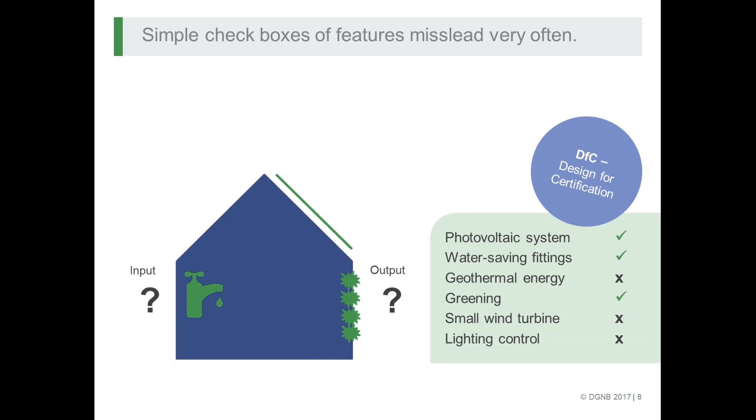When it comes to performance-based assessment, what we have learned is that simple checkboxes very often mislead, if only a feature is being seen as green or sustainable. If the context of where the building or object is located, or what can be done, isn't considered, then these checkboxes really don't help.

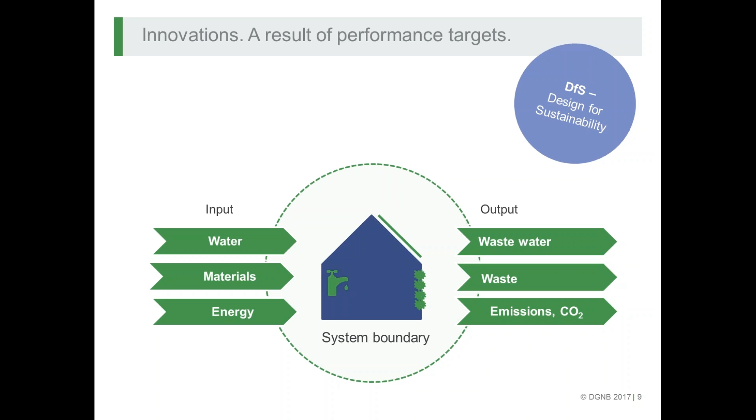Secondly, they hinder, from our perspective, innovation. Therefore we said we really want to encourage design for sustainability. I know it's quite difficult, but we really work on getting the performance perspective into our criteria, where it's more important to look at the input and output and evaluate those metrics, and not how it was done.

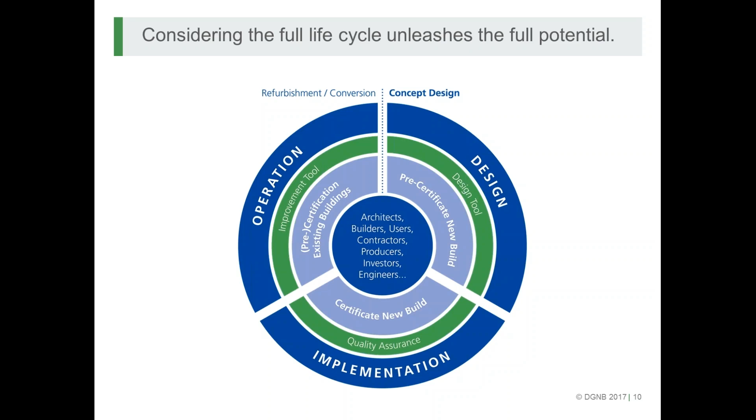The third aspect, the full life cycle, is not just the life cycle of the planning. We know it's very important to start in the design phase of the building and bring it into the realization phase when it comes to new buildings, and there we have our certificate, for example, when the building is ready to be used. But it's also, of course, important to look at the operation, refurbishment, and conversion later on.

But when it comes to life cycle aspects, for example energy performance, we have also seen that it is very important that regulatory politics are very good in supporting long-term goals. You can see these pie charts. The very left pie chart is...

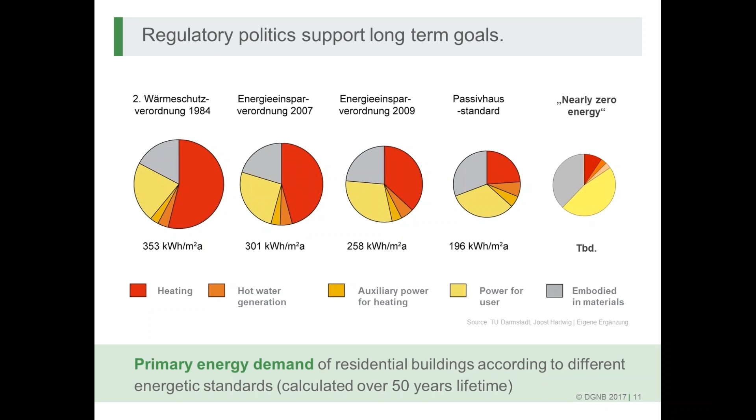1984 regulation of residential buildings shows how the energy performance looked like. A lot of power was used for heating, and a lot of power was also used by the user. Then regulation started to work on getting this heating, hot water generation, and auxiliary power down, and this really worked. The pie gets smaller and smaller, but what is getting now much more into focus, when it comes to energy and also other environmental aspects, is of course the embodied impacts in the materials, and also the power used by the user, which in Germany is not regulated at all.

This life cycle perspective showed us the development that we really have to take a look at, here in this case, the embodied impacts, for example.

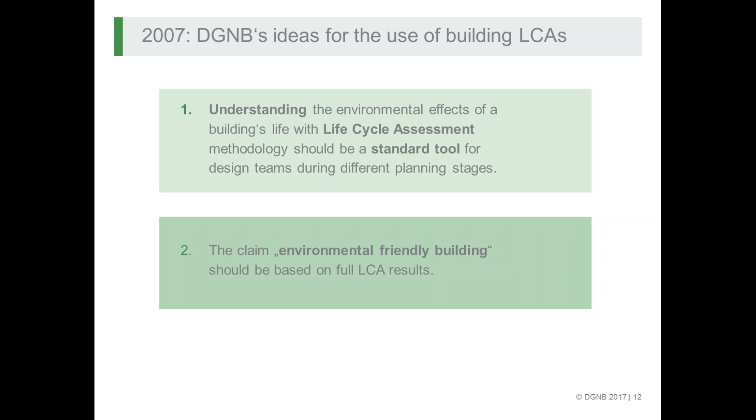And therefore, we had the idea in 2007 that we want to understand the environmental impacts and effects of a building's life cycle, and that life cycle assessment methodology should be a standard tool for design teams. That was what we wanted to achieve. Secondly, if anybody says this is an environmentally friendly building, this claim should be based on a life cycle perspective, or on full life cycle assessment results.

So why is it important to consider the full life cycle? On the one hand, we know that focusing on energy consumption only during the operation becomes misleading. I think this is the case in Europe and elsewhere, that it is covered by legal requirements anyway, and we, as DGNB, want to go beyond that.

Secondly, we know that widening the scope helps make better decisions for truly better buildings. So when I start thinking of where it comes from and what happens with it, you can really say that you make better decisions for the future and for other generations.

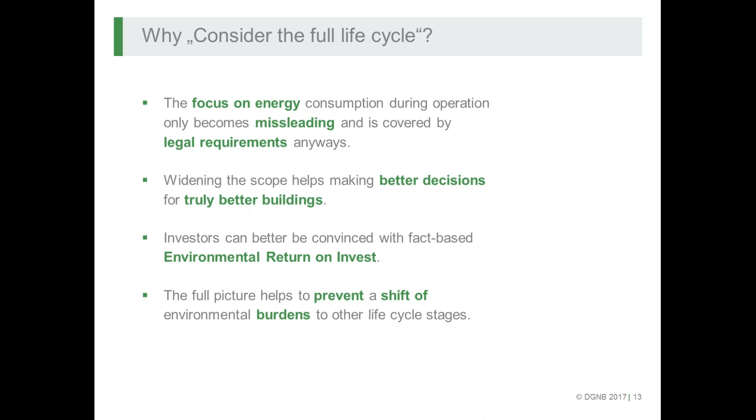Thirdly, with the life cycle perspective, you can calculate the environmental return on investment. So how much do I get from my investment, from an environmental perspective? With insulation or whatever feature you include, you can see directly, by using LCA methodology, what comes out throughout the lifetime of the building.

And last but not least, of course, as an environmental engineer, it is always important to prevent the shift of burdens to other life cycle stages. So if I do something in the production phase and don't think about the end of life, then nothing is gained.

But then we had the question, how can we start? So what's first, the chicken or the egg? We knew that as phase one, we needed to get data to start.

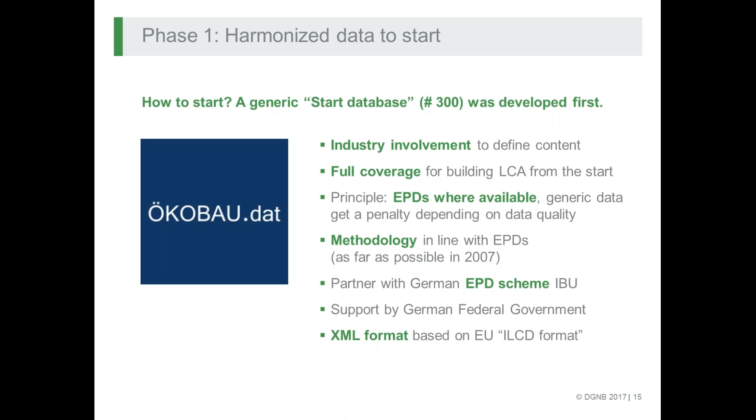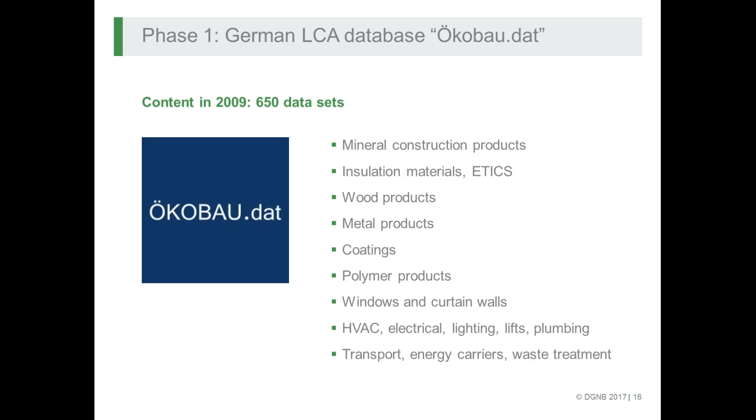We had in Germany a so-called generic start database. I think it was just 300 data sets that were included. It was developed with industry involvement and supported by the German federal government, and at that time it was in line with the EPD methodology as far as it was possible in 2007.

And this start allowed us to go further, and the database that was further developed had a big increase of interest, with more data sets being added. In 2009 there were already 650 data sets for all different product types, as you can see here, and this allowed us to calculate full LCAs, although 650 data sets is of course not representing the whole range of building products available on the market.

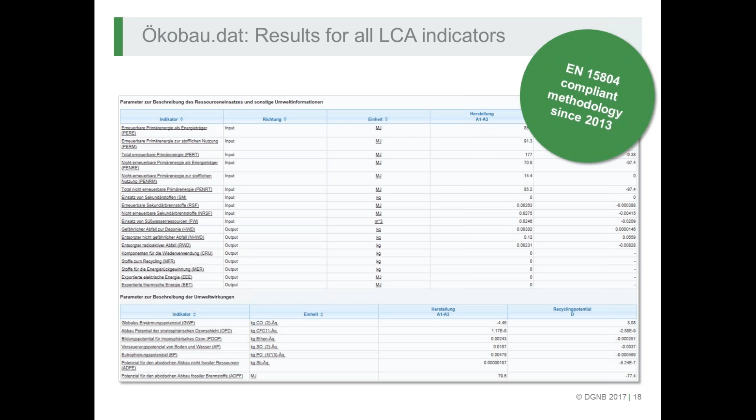But anyway, it was a very good start and allowed us to ask for full building LCAs. If you're interested in looking at the latest version of the database, it's publicly available. It's called ökobaudat.de—you can find it when you search on Google. It now includes more than 1,000 products, and by the way, it is now EN 15804 compliant.

So the results look a little bit dull, but when you know the methodology used in Europe since 2012, the 2013 version of the database followed exactly this EN 15804 methodology—the indicators, the modules, and everything required by the European standard.

And then, of course, it was also important for the manufacturers to show that they are producing what they are producing, like EPDs, that they can find it wherever they put it. And we also have our DGNB Navigator database, which includes

EPD data sets of various building products. So phase one, getting the data. We started in 2008 with the first generic LCA database, based on a consistent methodology, and this allowed us to integrate full building LCA into our DGNB scheme. Since 2009, this database is called ökobaudat.

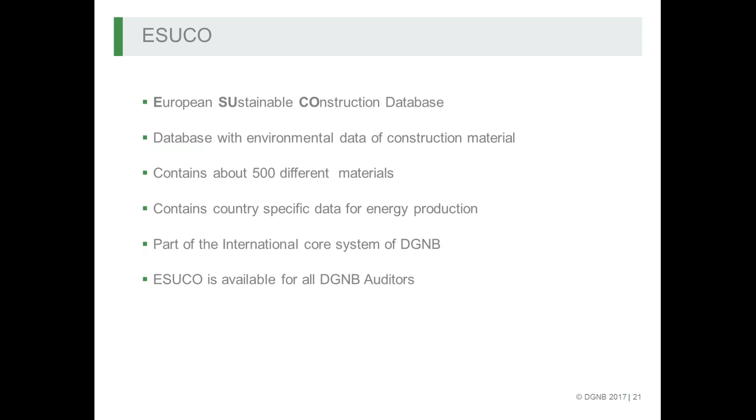It is a result of the collaboration of LCA experts, database providers, EPD providers, building ministry, and industry. In 2011, DGNB learned from this experience, and we developed and released further START databases: European average, Brazil, China. I'll show you later some content of that. And since 2012, the European standard for EPDs or LCA data, the EN 15804, was released, and this was also a big boost in Germany to do EPDs and provide EPD or LCA data in a very consistent and clear methodological way.

Very briefly, what I just said on the START databases - we as DGNB have also an international scheme that can be used, and we know that the German database is not the right tool for many applications, and therefore we have developed the ESUCO database, a European Sustainable Construction Database with about 500 different materials and country-specific data for energy production, and it is available for all DGNB auditors. If you want to know more, I'm happy to provide you more information. And the same we did for Brazil and China, and I think also for Eastern Europe average as well.

So now we had the data, we were able to say, now we want to calculate the full building LCA, but how can this be done pragmatically in an environment where planners and designers are already very, very specialized, where we all said it really brings so much value to know more about the buildings or the building products that you're intending to use. So how can we do this?

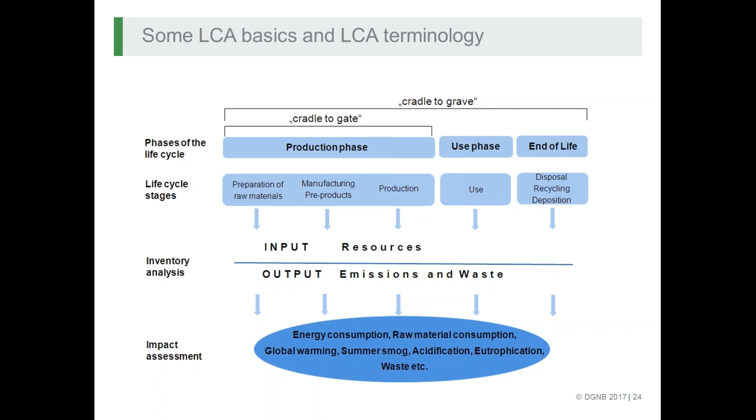Then actually somebody - brave people - sit down and look at all the inputs, the resources that are needed for each and every product step for this life cycle, and all the emissions and waste generations, and it is a huge amount of work. But the good news then is you have hundreds and thousands of entries for such a production chain, but then the impact assessment comes and uses so-called characterization factors for indicators, and then calculates so-called indicator results, environmental indicator results

that allow to work with all the thousands and thousands of entries of single emissions. So at the end you have indicator results, and this is what people can use to optimize their products, their production, or to choose or to make claims about the environmental effects.

As DGNB, we said, okay, we have to write down a standard how to do this calculation now for buildings. And in 2008, we released our first version, which included already LCA calculation as very important criteria within the scheme. And these standards, the standard how to calculate a building LCA, I think today it contains maybe 30 or 40 pages of description on how to do this exactly.

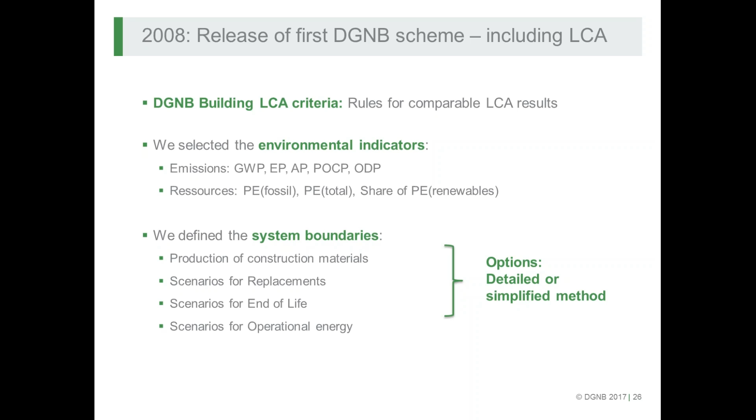And after we have selected those indicators, we define the system boundaries that need to be studied to have comparable results. Everybody can calculate as much as he or she wants to, but if you want to have comparable results, you need to define a common understanding of the system boundaries. So we said the production of the construction materials needs to be inside, scenarios for replacements, scenarios for end of life, and scenario for the operational energy use.

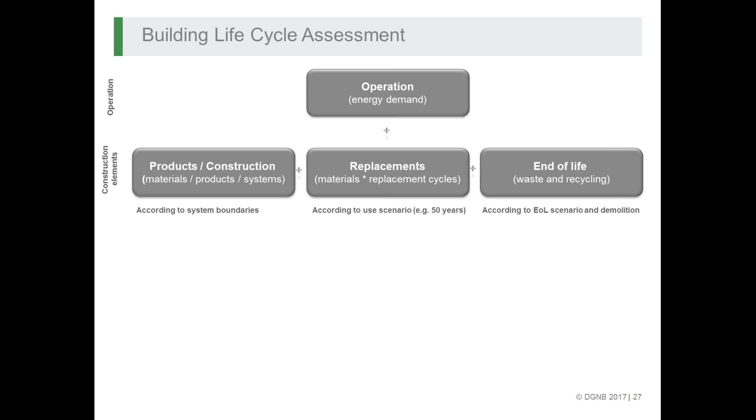And we have taken out some modules out of the system boundaries. I'll show you later, for pragmatic reasons, because otherwise it might have been the full picture of everything, but it won't help to get better buildings.

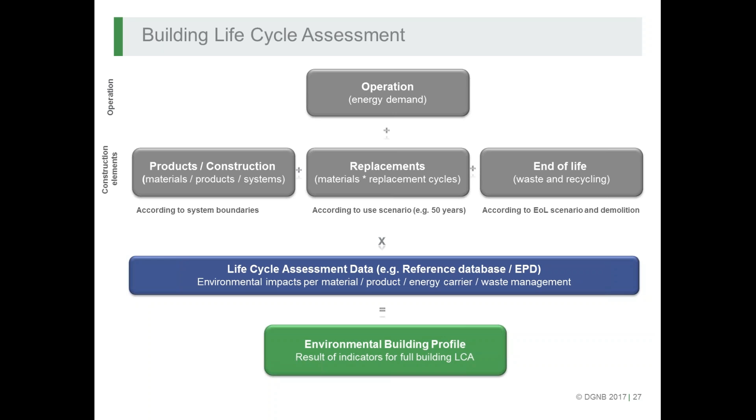Especially for the selection of the construction materials, we have offered from the very beginning two options: either you could do the detailed method, which includes everything that is in the building, or the simplified method, which has a predefined content of building elements that should be looked at.

And then the building lifecycle assessment is nothing else but a simple calculation where you're adding the construction, the replacement, the end of life, and the operation. We have defined the lifetime under consideration as 50 years for typical buildings. For industrial buildings, we have chosen 20 years.

Then you multiply it with the LCA data, e.g. the reference database Ökobaudat, or with EPDs if you already know which product you built in and the EPD is available, and then you get the environmental building profile, so the full building LCA result for the selected indicators.

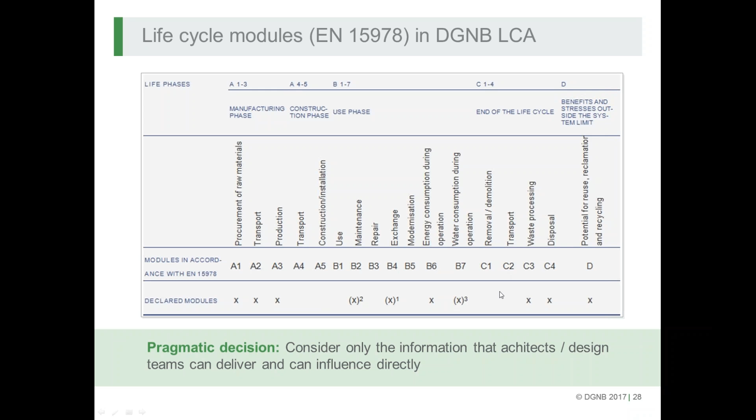So pragmatically, we said we want to consider in the building LCA only this information that architects or the design teams can deliver, and that can be influenced by the team as well.

So we knew, for example, transportation, of course there is a way of influencing it, but to get the information on which truck type was used, how many kilometers it drove, was a bit too much, especially in the beginning.

And for some aspects we said, for example, the transport to the end of life, that's so far in future, and we don't know exactly how this will look like. We took that out, and if everybody takes it out, the mistake at least is the same for everybody.

The building elements that are to be assessed when using the simplified calculation method, I can assure you that nearly everybody is using the simplified method. There are some brave people who use the detailed methodology, but this is really work when you really want to get everything into the LCA.

And the tools that are currently used or on the market are sometimes not, it would be too much effort, and so everybody uses the simplified calculation method, which is okay, because it really helps people getting away from the pure energy perspective into the embodied impacts perspective as well.

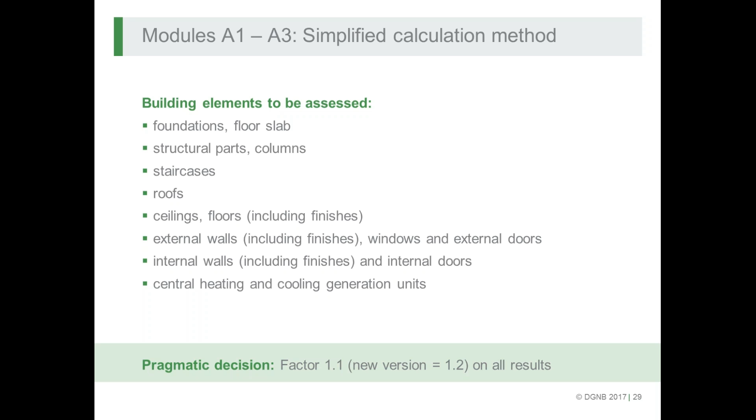And we have put a factor of 1.1 that is to be used when using the simplified method on the entire results. We have increased this factor now to 1.2, because we have evaluated studies that show that the building technology is around 20% of the total environmental impacts of a full building LCA. So we have increased that factor.

This can be seen. People can say, well, this is critical, you're neglecting something, but on the other hand, if we would ask for too much information, people wouldn't do LCA or wouldn't follow this idea at all. So we use this factor that comes on top.

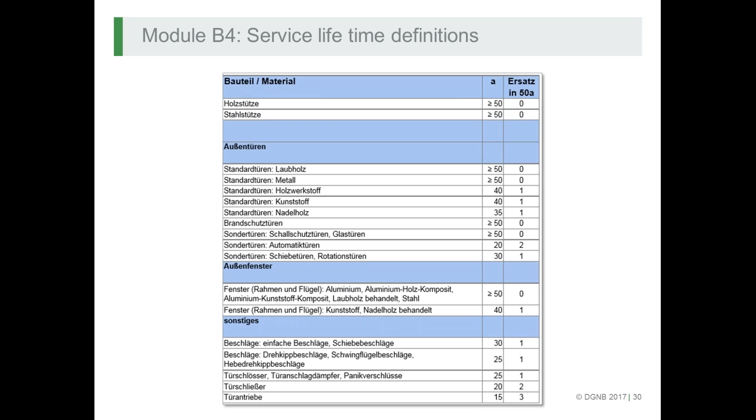For the life or replacement cycles, in the first stage we worked with a limited but common list of defined lifetimes of typical building products. This list was released by the German Federal Ministry, and we're happy that this work on typical lifetimes had research projects going on, resulting in a quite good and extensive list. These lifetimes should be used in LCA calculations if a manufacturer doesn't have proof that in his case the lifetimes are much longer or much shorter.

However, manufacturers can implement specific values. There's also an ISO standard that tells exactly how to get to those figures, but usually people use this list. Since it's only in German, if you have some translators, I can give you the hint where you can find that.

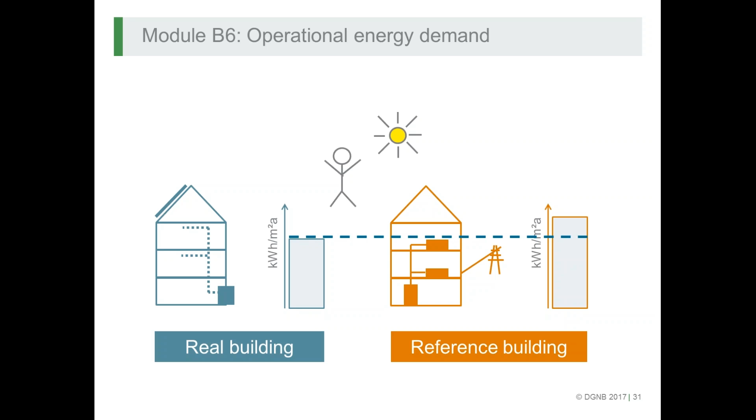Then for the operational energy demand, we knew we need to use calculated results for new buildings. So for the real building, we have the energy regulation that says how the energy calculation should be done, and we use the results of that calculation—the final energy—combined with emission factors out of the Ökobaudat, for example specific heating or electricity data sets. In our legislation, the calculation of a reference building is already required, and the results of the reference building is also used in the calculation of the reference value. I'll come to that later, but actually this is really helpful in getting very object-specific references.

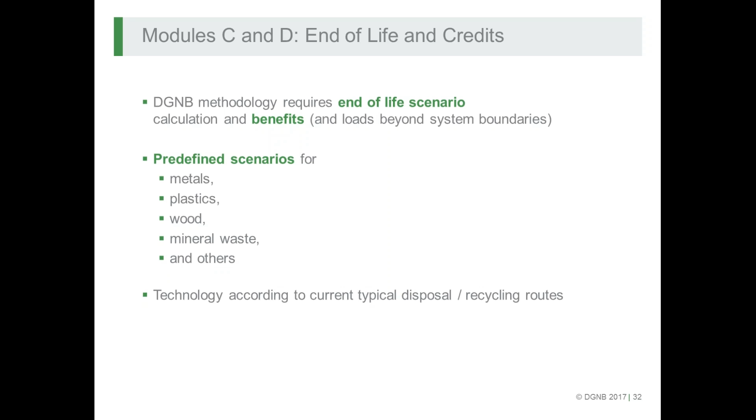Then the famous modules C and D, the end of life of the building. We said the end of life needs to be calculated—a scenario for this needs to be calculated, although of course we know it might be a very, very long time before this end of life occurs, but it still needs to be considered. We decided as well to take the benefits and loads beyond the system boundaries into the calculation, into the system boundaries as well.

We have defined scenarios for different types of building products such as metals, plastics, wood, mineral waste, and others. The technology taken in the data sets has to reflect current typical disposal or recycling routes. So what is happening today is sort of part of the scenario for the future—there's no adaptation or looking into the future for how a future recycling route or disposal might look. It's today's situation transferred into the future.

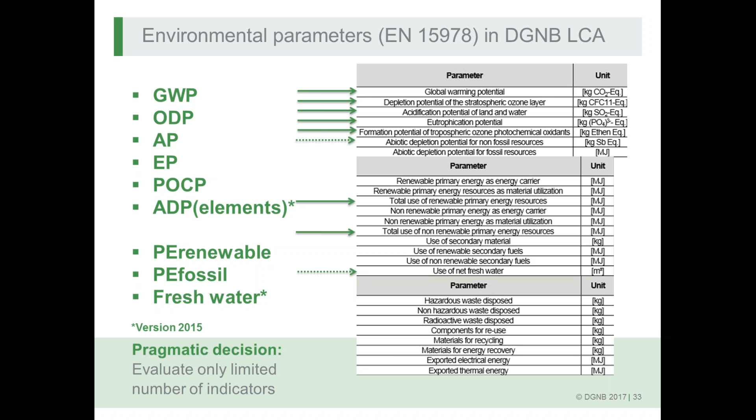The environmental parameters, as they are called in EN 15978, are ones we chose from the very beginning. I already named them, but here you have the exact names. We chose to use ADP elements since our latest version in 2015, since only then did we have the fitting database for that. In 2013, the EN 15804 compliant database was available, and in 2015, when we released the next version, we said we want the calculation results of ADP elements, because this was a resource-related indicator we saw missing, and freshwater use—net freshwater indicator—is also a new indicator we want to see now as results in the building LCA calculation.

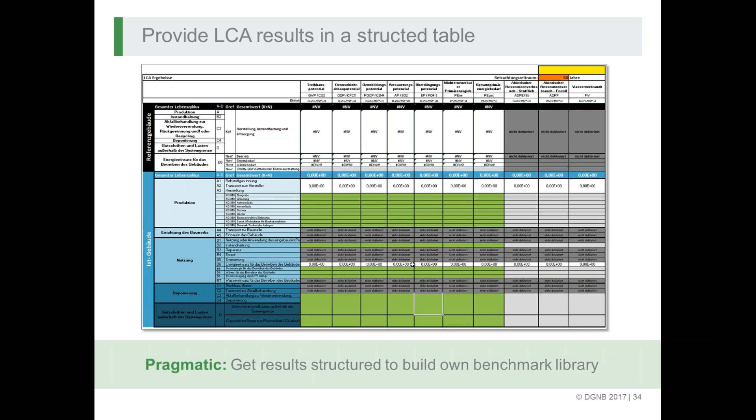We are not using other indicators yet, because we have the freedom to select those we find most appropriate to drive forward our targets. This doesn't mean, for example, that we're not interested in recycling or disposal, but we have a different way and different criteria to look at that, which are a little bit different from what the standard asks as information about a building.

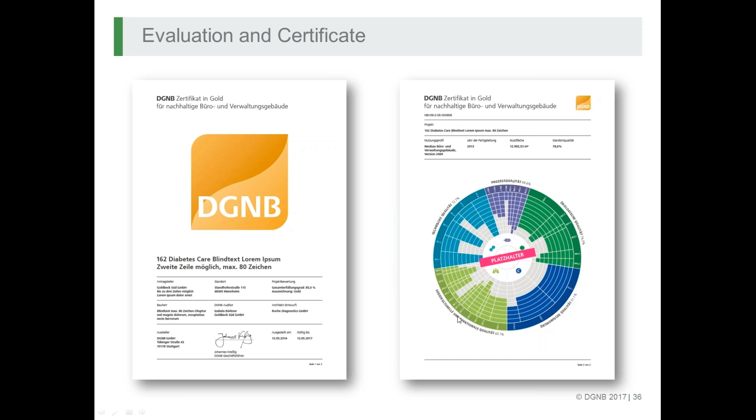And actually the provision then at the end—so we get hundreds and hundreds of LCA calculations from the building stock—we decided from the very beginning that this should be done in a very strict way, a table that is defined by DGNB, so we can take out the results and build our own benchmark library. So again, very pragmatic: we wanted the results in this structure because then we can work with this further. So phase 3 was then, now we got all the results, what can we do with this and what does it mean?

Maybe just a little bit of an insight into DGNB, how we are weighting and evaluating. So the highest level is you get a certificate in a platinum, gold, silver or bronze color. This flower, as we call it, shows you the performance of each and every indicator.

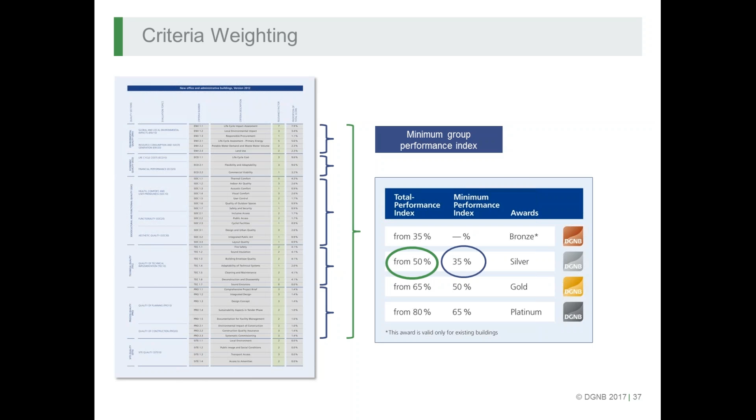The calculation of the levels of the awards is done by a total performance index, so we are working with percentages. The total percentage of all criteria that are relevant gives you the result of the award. From 80% you get platinum, from 65 to 80 it's gold, from 50 to 65 it's silver. Then we have a minimum performance index for all our so-called quality groups, which makes sure that a platinum building has at least 65% in all quality groups, so it's a holistically balanced sustainability performance, not just one that is very good in one quality and very bad in others.

This is actually a very important method to make sure that the buildings we are awarding are truly sustainable. We have for office buildings 40 sustainability criteria. The weighting is done over the so-called quality groups, as you have seen before.

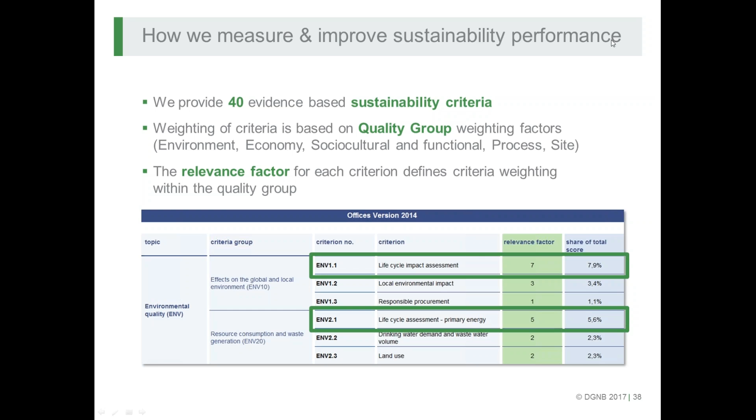So here is the excerpt of the environmental quality group for offices, version 2014 in this case. And then we have so-called relevance factors, which give the relevance of the criteria and help calculate the share of the total score of the criteria in the entire scheme. And you can see here, ENV1.1 and ENV2.1 are our two LCA criteria, and they make up together more than 13% of the entire mark.

So for LCA, when it comes to how good or how bad the results are, we said we will provide benchmarks, and we did this from the very beginning.

Just to give you an insight into this benchmark generation, we call this the benchmark. They are based on a reference value. The reference value is a total life cycle benchmark, construction plus use. For construction, we have a fixed benchmark for all environmental indicators plus primary energy.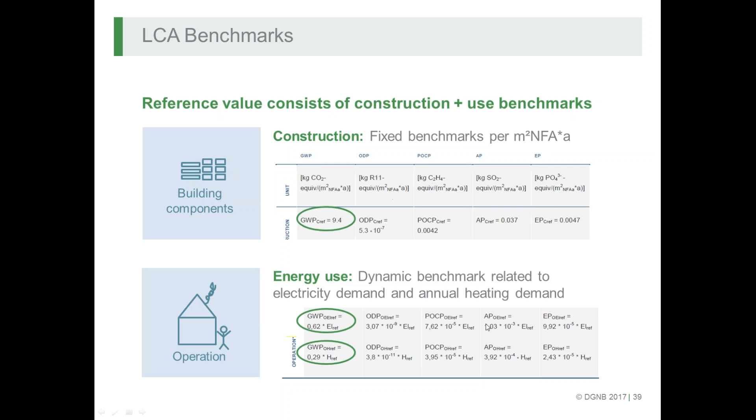This is in the example of global warming potential, 9.4 kilogram CO2 equivalents per square meter and year. This is our benchmark for construction, so everything construction, replacement and end of life. For the operation, we use the reference value of the energy calculation that has to be done anyway. This has to be multiplied for electricity and heat with emission factors, which gives you the result of the operational global warming potential of the reference building. The sum of 9.4 plus the operation is then the total life cycle reference value, and this is exactly the same for all the other indicators as well.

The reference value itself is worth half of the points. It's good practice, it's okay. Then we have a limit value, and we have a target value, which gives you 10 points out of 100.

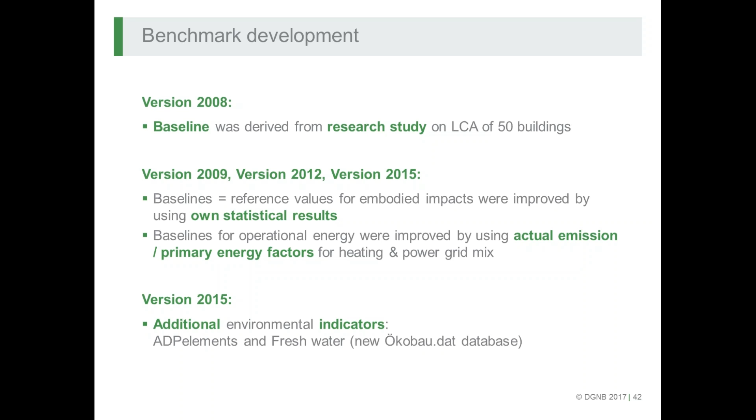What are our lessons learned? When I look back now 10 years of DGNB system and DGNB as an association, and many years of LCA calculation, one lesson learned is that having consistent LCA tools on the market took actually much longer than we thought in the beginning. When we released the first DGNB scheme in 2008, my maybe naive thinking was that in 2-3 years we would have a lot of LCA tools that could be used, so we'd have a selection and LCA calculation would be easy, so people could concentrate on the results. Today we actually have around 5 LCA tools available that can be used for DGNB calculation, and of course various dozens of Excel or Access solutions, which we also accept in certification.

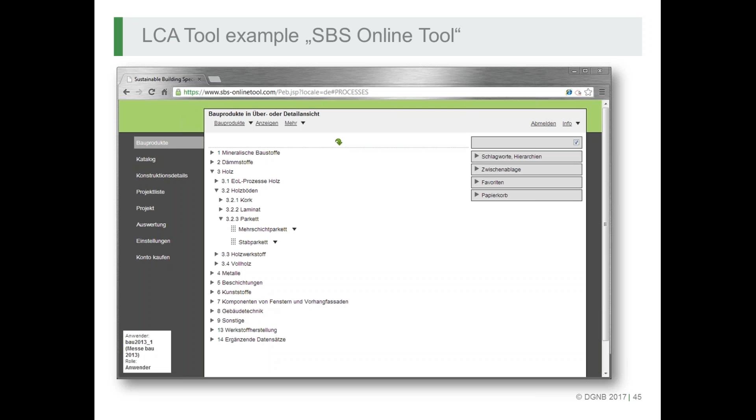This is one of the tools that is used quite frequently. It's an online tool, so if you're interested in getting an insight, I think there's also an English version available. You can contact the providers, and I'm more than happy to guide you through that.

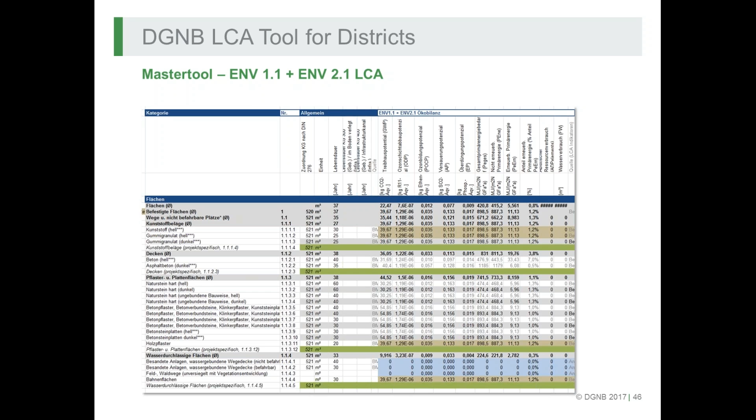For districts, that's maybe a different story. We also have a DGNB scheme for districts, which is a little bit different, but for districts we decided we would develop our own master tool, as we call it. It's an Excel-based LCA calculation tool that can be used very easily and contains all the data needed to calculate the LCA of a district.

The second lesson that we learned is that there are really quite some barriers to using LCA in early planning stages. When you think about when such an environmental perspective over the whole lifetime has the highest value, everybody agrees it's in early planning stages, but we don't see a lot of projects that really use LCA at these stages. Very often it's only at the end, shortly before handing in the information to DGNB, that the LCA of the existing building is calculated, but it's not really used to create truly better buildings. So we know it is a question of cost and effort, knowledge, and tools.

So what we have decided now is that in our version 17 we give, again, incentives to score below the limit or above the reference values, as explained before. Those are the main points, but additionally we want to give incentives and points for using LCA in early planning stages with different experts included. We also give points if user-dependent energy demand is incorporated into LCA, because we know this is the next big thing. Regulation moves forward, but user energy, for example, is not under consideration at all, and growing comfort requirements make this situation even more difficult.

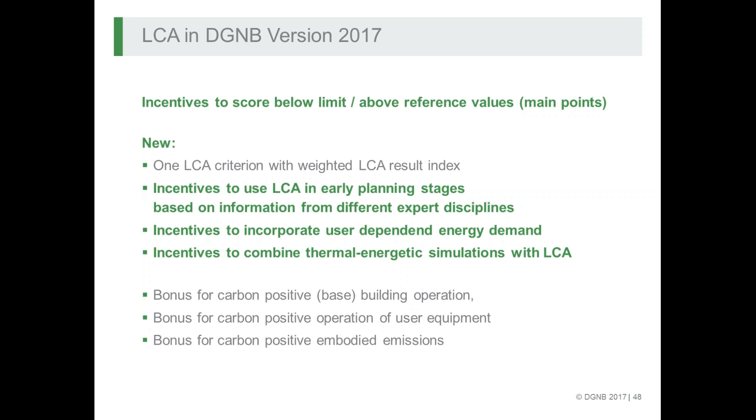Then we give bonuses for carbon neutral or carbon positive building operation, carbon positive operation of the user equipment, and, if we will ever find it, also a bonus for carbon positive embodied emissions. That's a sneak preview into our version 17.

And then the last challenge we have up front is that yesterday I gave an 8-hour teaching course here in Stuttgart to architects and energy planners on LCA, and it is said that, okay, it's yet another specialist discipline.

We know today it looks like only specialists can do that, but this is also a question of the availability of tools. I'm very confident that the tool situation will change in the near future, and then it becomes much easier, and LCA can become a standard practice in planning.

If this little course on LCA that I gave you gives you an idea of how LCA can be done, I would be happy. I'm now at the end of my presentation. I would be happy to hear that you want to become an LCA specialist yourself, or teach others, or incorporate that into your schemes, or however you work on improving the sustainability of the built environment in your country.